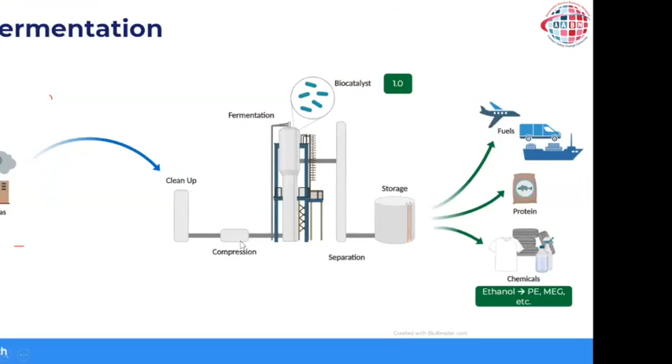And the next slides, please. So instead of talking too much about the peripheries, getting close into the technology, this is how the technology is working. Suppose, as I mentioned, it all started with a steel mill off gas. So any industrial off gases, you know, it is a pollutant. It is full of content.

It has a lot of contaminants. So the first and foremost step is to clean up the flue gases or the off gases coming from industry. For example, if we take a refinery gas, like carbon dioxide, which is coming from the heaters or boilers, it contains so many other components which are not very easily converted.

And also this technology, this is a gas fermentation technology using microbes, and it uses a biocatalyst. So as I said, I mentioned about merging the biology or the microbes and putting them into industrial use. That is what this technology is about.

So when you take the off gases or the waste gases, it will have so many contaminants. And what they have done is they have analyzed various waste gases and devised systems and chemicals to eliminate those contaminants, and that is what the cleanup step is about. The cleanup step takes care because we are going to subject these gases to living organisms which are there in the bioreactor, or the biocatalyst is a living organism.

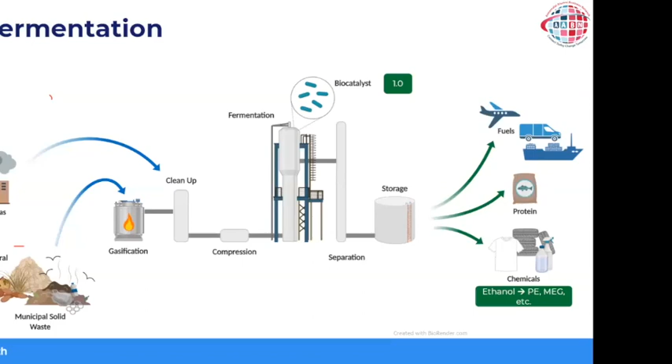So when you are going to use this, the gases should be contaminant free. So the first and foremost step is the gas cleanup. And in fact, they have speciated so many chemicals, and they have found ways to mitigate the effects of those contaminants on the microbes. The gas cleanup step includes all the essential requirements that will clean up the gas so that the microbes can convert them into useful products.

When we talk about the microbes, they are going to be anaerobic microbes. So they are averse to oxygen. They don't like to see any oxygen. And if you subject these anaerobic microbes to oxygen, they get killed. They simply can't exist in an oxygen atmosphere. So the gases which are coming from the industrial off gas have to be completely removed of oxygen. And that is the first and foremost step.

Now coming to the microbes as such, how do they live? The microbes can digest some of the gases like carbon monoxide and hydrogen. And in this digestive process, they can convert the carbon monoxide into ethanol. That is how the microbes live. This is like putting the microbes into action, converting the waste gases like carbon monoxide into ethanol. In this process, when they start digesting the carbon monoxide, they also consume carbon dioxide, and they convert that carbon dioxide also eventually to ethanol.

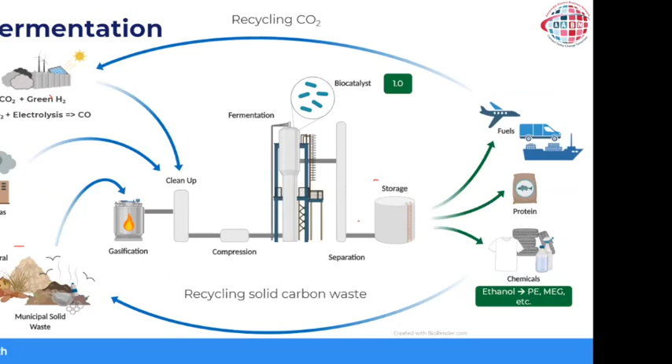So one step is the industrial off-gases. But we don't stop there. This process can also take waste, like municipal waste, biomass, agri waste, or whatever is considered waste. Through a process of gasification, this waste can be converted into carbon monoxide, hydrogen, and carbon dioxide, and then fed into the bioreactor to get the ethanol product. So this process is feedstock agnostic - it can take any feed, but the feed has to be properly treated, and it's mostly waste.

We don't need a specific feedstock. When I started my career in MRL, I would say this unit is designed for this crude only, I don't want to touch any other crude. No - this process is designed to take only waste. So we are a sort of corporation to clean the world's waste into a useful product. That is how it works.

One good thing about this company is they have invested heavily in this country. Even the gasifier they picked is from one of their gasifier partners, called Ankur Gasifier, located in Vadodara, and they are also working with the Indian Institute of Science to improve the composition of the gas. So this company invested heavily in India, for reasons better known to them - in my previous company, we used to call China the land of honey and milk, but this company believes India is the land of milk and honey.

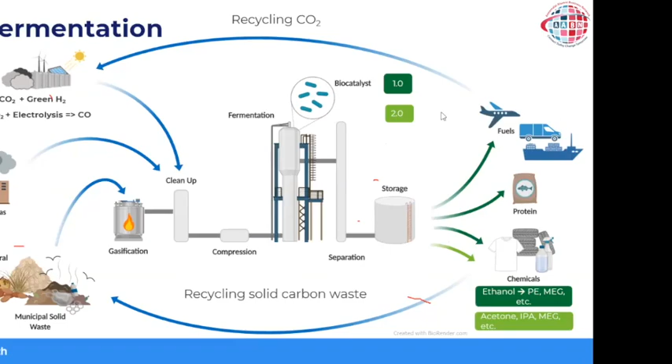Moving further, this is not just a theory or in a lab - next slide please - this has been put into various plants, and a lot of plants are built. In China, there are 3 plants working currently. In India, as we speak, IOCL Panipat is commissioning their 3G ethanol plant using this gas fermentation technology, using industry PSA off-gases or SMR hydrogen PSA off-gas and converting them into ethanol.

And so far - next slide, you can go to the next slide - yeah, they have captured more than 200,000 tons of carbon dioxide into fuels, especially ethanol. And there are 3 commercial plants running.

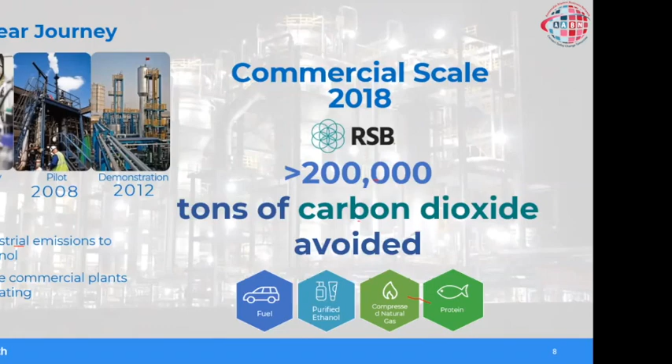And the plant - next slide please - the plant which is coming, and these are continuous, by the way. It is not an intermittent process; as I said, it runs 365 days a year. So as long as it is...

But what it needs is, once in 90 days, because you are using very dirty gas, you may need a shutdown to clean up the whole bioreactor with some hot wash or some chemical cleaning once in a while. But we have seen some of the plants in China run 365 days even without an intermediate shutdown. It all depends on the gas which is used. Otherwise, this is a very continuous process, unlike the enzymatic fermentation.

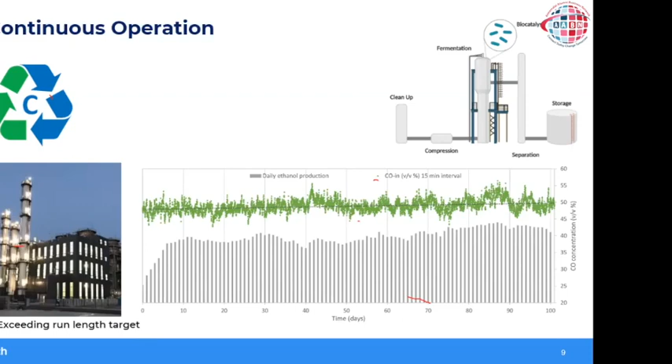The next slide is the plant which has come up. This is in Europe, again Belgium. This is a steel mill off-gas, converting that into ethanol. What this technology brings is, see, earlier people used to talk about verticals: I'm only into chemicals, I'm only into steel, I'm only in cement. But this particular technology can fit into any of those industrial off-gases.

In fact, steel mill off-gases are the most preferred because, as all of you know, the blast furnace gas, or basic oxygen furnace gas, contains carbon monoxide. They are ideal feed for this. So decarbonization in the steel sector is much easier with this, because the gases available from the steel mills are easy prey for these particular microbes, and this plant will be commissioned this quarter; it is in the advanced stage of commissioning.

So the story is that this is not a theory, this is not a lab scale experiment, it is not a demo plant; it is commercial plants, and a lot of plants are coming up in India also. As we speak, these plants are coming up worldwide. I'm going to the next slide.

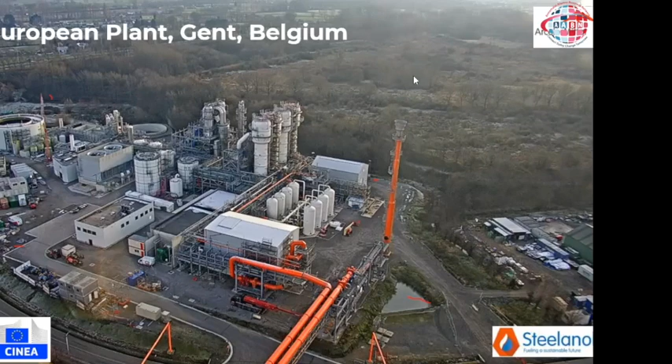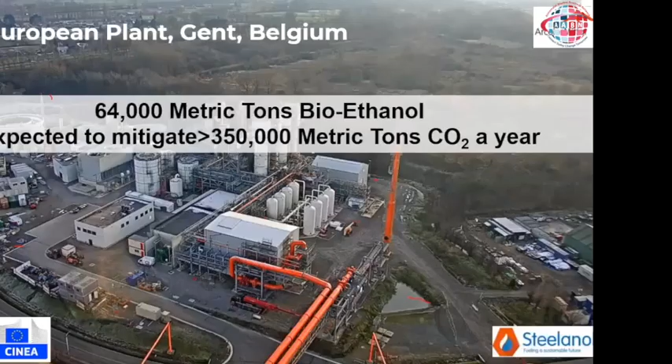Already I mentioned there are 3 plants working in China, and Indian Oil at Panipat refinery is building this plant with the refinery off-gases. MRPL has embarked on an ethanol plant using biomass. They are going to use cotton stalk, not refinery-based gases, but agri waste, that is the cotton stalk. So there is a gasifier. Ankur, as I mentioned, is going to be supplying the gasifier, and that plant is progressing.

And as I said, Suncor in Canada has put up a demo plant, and they are also going for a commercial plant. So these plants are coming up throughout the world. In fact, there were a lot of doubts whether gas fermentation will work or the microbes can sustain in this, and that is very well demonstrated with so many plants coming up. Those are very genuine, very honest questions. It's not easy, but they have made the tough thing, with all these engineering challenges, into reality. So that is about the technology.

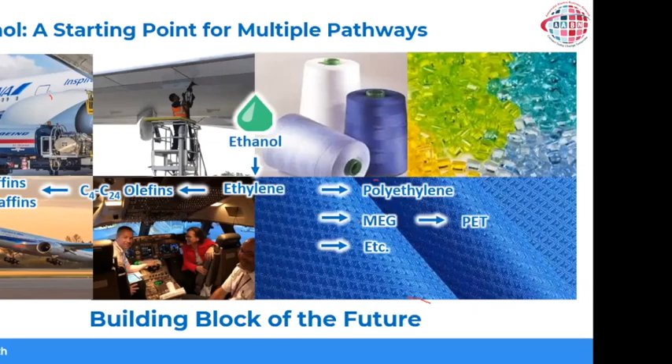We are into ethanol, and I'm sure when Partha talked, he was talking about methanol. As I represent an ethanol manufacturing company, maybe I will say ethanol is the best, but the reality is all these chemicals will be the future starting point for the chemical industries, without completely depending on conventional fossil fuel feedstocks. That is what is emerging, and technologies are progressing to make the chemicals of the future. And moving further, this company has also embarked on a mission. The next slide, please.

Carbon smart approach. So that is what it is. See, we have seen how we can be carbon free. Then we know it is very difficult to make the fuel carbon free. So how do we do this? That is why this company has invented a technology called SAF.

Next slide, please. That is, convert this ethanol into sustainable aviation fuel, or it is called alcohol to jet. So that company is called LanzaJet. It is fully owned by LanzaTech and other partners like Shell, Suncor, and DOE. By the way, the US government has invested heavily in these technologies. They are looking at these as the technologies of the future. So DOE has invested heavily in these companies.

And what they do is they take the ethanol from LanzaTech. The first step is dehydration, and we work with our partners. There are a lot of dehydration technologies, and one among them is Technip's Hummingbird technology for dehydration of ethanol. From ethanol, they make ethylene, and from ethylene, they oligomerize ethylene into aviation fuel. And once it is oligomerized, it has to be hydrogenated.

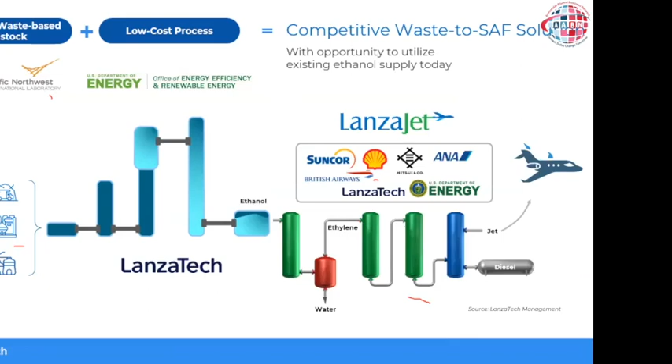So this process is catalytic. It is not any enzymatic or microbes-based technology. It is conventional catalytic technology. And LanzaJet is the company which can offer this technology, and there are many others. So it is not only LanzaJet, but this is why I brought this up: last time there was a question, how do we make SAF? So I thought I would share this with the group. And moving further.

As I said, carbon smart is what this company has embarked on. So we work with a lot of brand owners like Mebel. Mebel is a brand mostly in Europe, and they make a lot of synthetic products. They also make a lot of cosmetics. So we have worked exclusively with Mebel. They have taken the ethanol produced from this gas fermentation and converted it into MEG. From MEG, they have converted it into PET bottles, and they have been using it as a green source.

And also Zara and Lululemon have made fabrics, and they have started branding these as green fabrics. So we work closely with these brand owners and convert this ethanol into various day-to-day fuels and chemicals. And they have also worked with L'Oreal, then Borealis, who make nice shoe soles. So that is also using ethanol.

I talked to you about the sustainable aviation fuel, SAF, flying a flight across the Atlantic. This is Richard Branson along with Jennifer Holmgren crossing the Atlantic. And they also work with Unilever to make surfactants and detergents using the MEG. And as I said, this company has invested heavily in India. So they have worked with India Glycols to convert this ethanol into MEG.

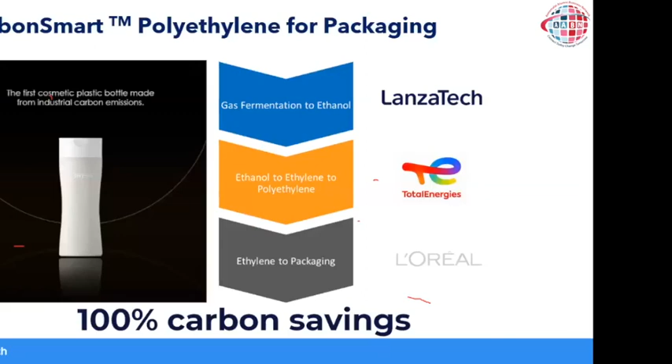They say these are all some of the fabrics. This thing. So let's stop here. Yeah, this is for a short time.

This is the way the ethanol is getting converted into detergents. See, you take the ethanol, dehydrate it using any of those technologies available, including the LanzaJet, and convert it into ethylene oxide. And ethylene oxide, you can convert it into PET bottles, you can use it in surfactants and all those things. These are all very proven, and these plants already exist. So it is not a big deal. So they can be used for detergents as well.

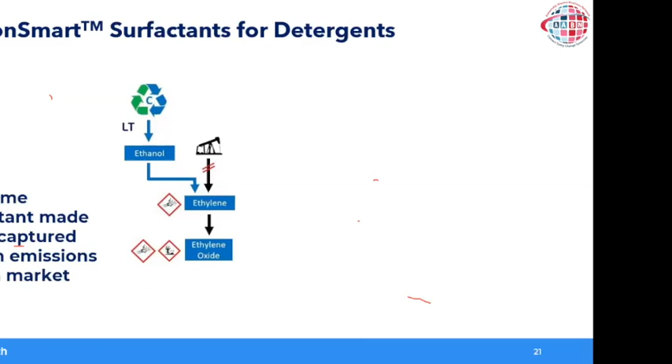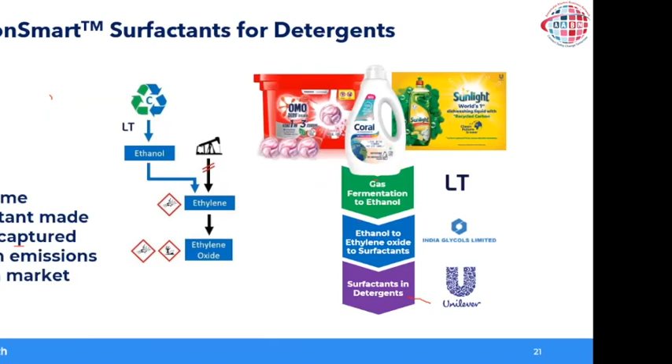Then the next slide, please. Sorry. Yeah. The next one. Okay. Let's stop here. Okay.

This is about PET. MEG can be used to make PET. You cannot create a cyclic molecule like paraxylene, because with these microbes it is very difficult. So you can only convert the aliphatic side of the chemistry. We have not progressed to the aromatic side of the chemistry. So we can only convert 30% of the carbon in this process.

But still, under European regulations, these are all branded as green products. See, it all depends on the law of the land or how the various countries look at it. Europe is the front runner in classifying what is green and what is brown. So they have classified this as a green product. But the effective carbon saving can only be 30%, because the aromatic side still has to be there, which constitutes about 70% of the PET requirement.

And moving further, I mentioned the source. Yeah, this is one important topic I want to talk about. See, we have put the ethanol microbes into industrial use. Our next mission is to produce other microbes. Take the next slide, yeah, okay.

See, the microbes will make acetone directly. That means it need not go through an ethanol step to make acetone or isopropyl alcohol. Next, MEG we can make, and also ethylene we can make. So by modifying this, with the same reactor, same process conditions, same feedstock, it can generate different chemicals depending on your end use.

But the separation system has to be designed, because isopropyl alcohol does not have the same boiling point as ethanol. So your distillation should have the flexibility to separate out the isopropyl alcohol. As long as you have the downstream facilities, the technology is there to convert this product.

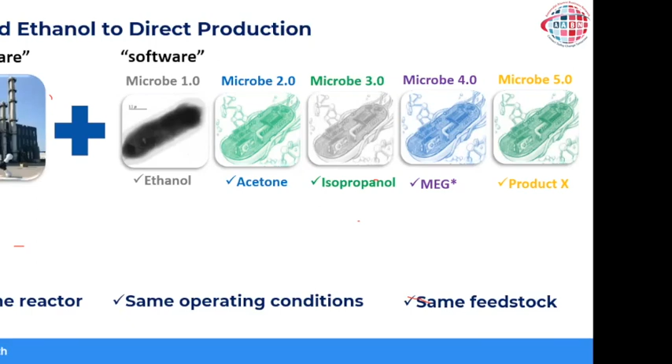So in a way, you can even use your waste gases and produce what you want, instead of saying, oh, I have only one product to sell. If this product doesn't sell, what do I do? That is the amount of flexibility these microbes can give you. So now let's see how these guys have done this. How is it possible? Now, the next slide, Gopi, please.

So it is a program. It is like they have set up a bio factory. They have so many biologists working behind the scenes day in and out, like a workshop. They generate these microbes and see how these microbes react, how they can live, what their side effects are, and how to reduce them.

For example, the first step in ethanol manufacturing is acetate. If you make only acetate, nobody is going to want that. It is very dirty stuff. So we have to quickly convert that acetate into ethanol. The microbes should be capable of converting it. That is what is getting done by having a

workshop type environment. Workshop doesn't mean it is all smithy. The microbes are put into the workshop to genetically modify them so that they can work in a plant and survive. So the next slide, please. The following slide. Yeah.

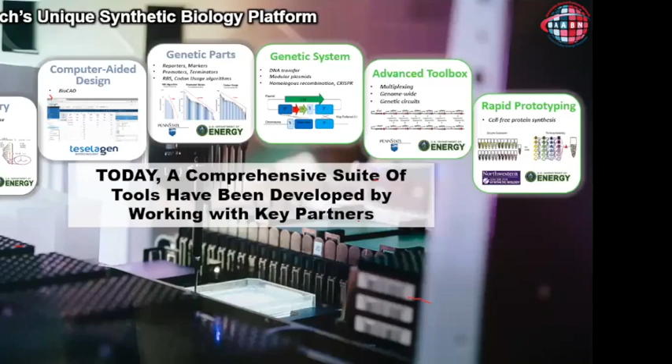The first step is discovery of the microbes, and we use a lot of CAD design to understand these microbes. These are all well understood using computer-aided programs, and the company has created a synthetic biology platform whereby the microbes are systematically converted into a biocatalyst, which can be put to use.

So it is a combination of just the biology, the advanced techniques of computer-aided designs, the artificial intelligence, and also each and every microbe is engineered to the requirement using this synthetic biology platform. That's how they created this network for sustenance of these microbes and for the microbes to do what is expected to do in a plant. This is in short about how these microbes are getting into the plant as a catalyst.

So moving further, it's a time to rethink about carbon. We don't call carbon completely waste. We think carbon can still be judiciously used, and we wanted to create technologies to create a world which uses the carbon judiciously. Okay, that is more or less the end of my talk, I think.

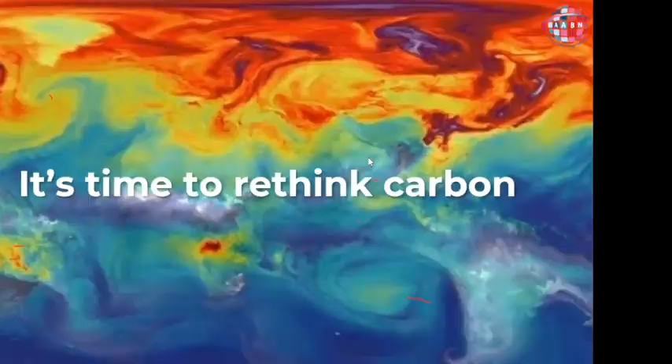And there are a few slides which I kept depending on the time. So I don't know how we are doing on the timing. I think it is approaching 12 o'clock. I don't want to test a lot of people's patience. So Gopi, how are we doing on the time? Yes, sir. You still have some 5-10 minutes, sir. Then we can move on to question and answer, sir.

Okay, no problem. So it is the rethinking or re-refining. As I mentioned, we don't believe that carbon is going to come to a stop. There are competing technologies coming up. The other sources of energy are building up. And it is good, we welcome those changes, and we effectively merge. For example, when we convert the carbon dioxide, we want green hydrogen, so that green hydrogen plays a vital role instead of conventional fossil fuel hydrogen.

At the end of the day, it all depends on the life cycle analysis. There are a lot of programs. Europe has embarked, and the US also has embarked on this life cycle analysis. The life cycle analysis is one study which will give you the carbon utilization, how much of the energy and how much the product is carbon utilizing. These types of life cycle analysis are done before branding any product as green, or what its value is to human beings. That is what is being judged by this life cycle analysis.